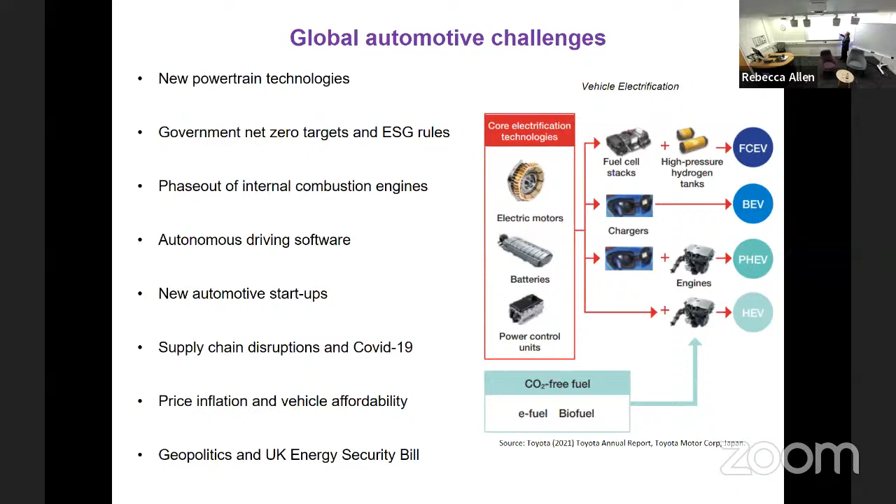We've then got the battery electric vehicle there, plug-in hybrid electric vehicle that merges a traditional battery electric motor with also a combustion engine, and you've also got the hybrid engine vehicle there as well. We'll be talking about these throughout today's session, okay?

The structure of today's talk is going to talk primarily about those 3 main innovations, and we're then going to talk about this new one, hydrogen combustion engine vehicles. They've only recently been developed. We'll talk about some of the implications that could potentially have for the automotive sector.

We're then going to look at Toyota, and we're going to pay close attention to Toyota as a case study throughout today's presentation. In particular, Toyota has a very high rate of patenting in the automotive industry and a very high rate of citations, and has played a key role with its suppliers in developing many of the core technologies that go into these different powertrain platforms.

We're then going to talk about my contribution to the literature, which is looking at how Toyota and its suppliers formed these innovations together in terms of buyer-supplier collaborations, supplier-supplier innovations, different innovation triads to basically create the core technologies that then go on to form the different powertrain systems. We'll then conclude with some managerial implications and conclusions as well.

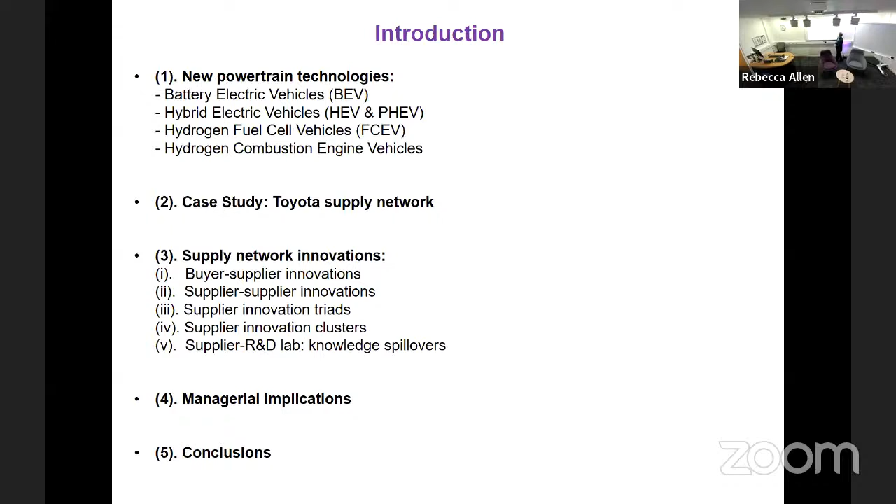So, when we talk about the different powertrain systems, think of an electric vehicle like this. So it could be, say, a Tesla, or it could be another automaker's electric powertrain system. You've basically got a very large battery, power control unit, an electric motor there. Okay. You then have the plug-in hybrid system, which basically means you have the battery, power control unit, the motor, a fuel tank as well, and the engine and the generator.

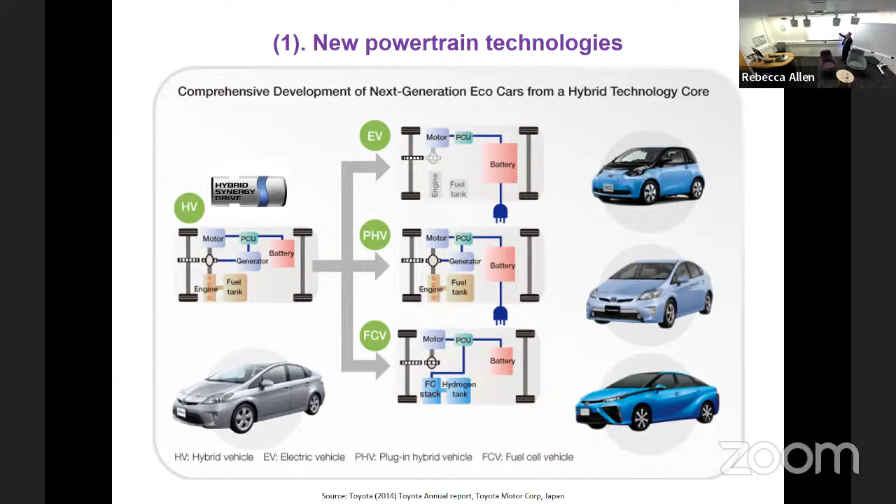That means that you can normally function the vehicle so that it can run on gasoline, and it can also run on the battery as well. It also has the ability to self-charge as it drives around too. And we then have the fuel cell system there at the bottom as well. So those are the 3 main approaches that many argue are the core basis of the automotive industry. So what does that then mean for the next 5, 10, 15, and 20 years going ahead?

So if you look at this graph, you can see the travel distance along the x-axis here and the vehicle size along the y-axis. And you can see how those 3 different powertrain systems form different parts of that graph. So the battery electric vehicles down here, which we're all used to, their travel distance is small to moderate, okay? And they tend to be much smaller vehicles, get a better mileage from them.

You've then got the hybrid and the plug-in hybrid ones here, where if you're traveling an intermediate distance, the vehicles get larger. And you've then got fuel cell over here on the right. Larger travel distances; they're hoping for things like trucks, but also the Toyota Mirai, which is a hydrogen fuel cell vehicle launched in 2015.

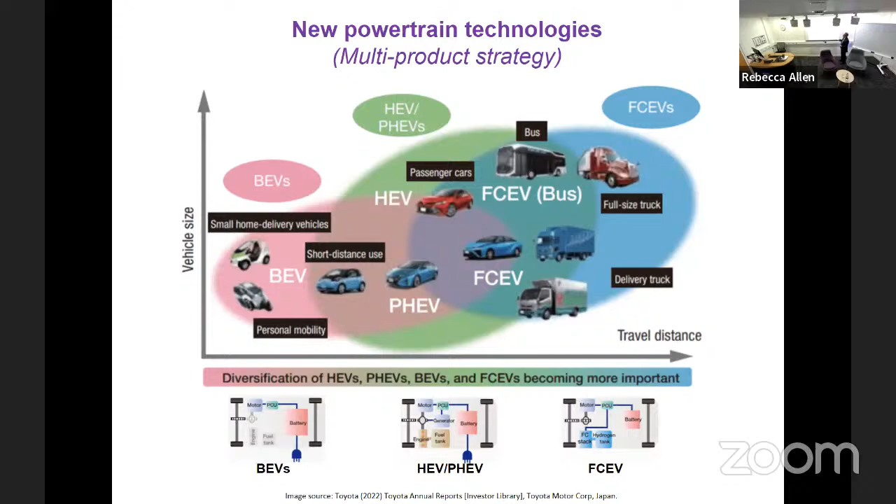Okay, and so that's where some people argue the automotive industry is kind of moving towards. Others argue it's going to be mainly around battery electric powertrain transmission, or as the batteries become more effective, they'll start to move out into this area as well. Okay, so that's really these three main different technologies and how they relate to distance and vehicle size.

So we'll look now at Toyota and see some of the innovations that they've been developing, because there's also on that graph the issue of personal mobility. If you go around Manchester here, it's a very dynamic city. You see a lot of people on electric bikes, electric scooters. Okay, went back probably about 6-7 years ago, that wasn't the case.

Okay, they've also developed at Toyota different types of technology platforms, including the Toyota e-Pallet, which is, best way to describe it, like a large vehicle that you can basically go inside. It's an autonomous vehicle and it will then move around the city a bit like a large taxi. And the idea here with its level 4 automation is that during the day, passengers will join onto the actual e-Pallet system. They'll move you around the city like a taxi or almost like a tram.

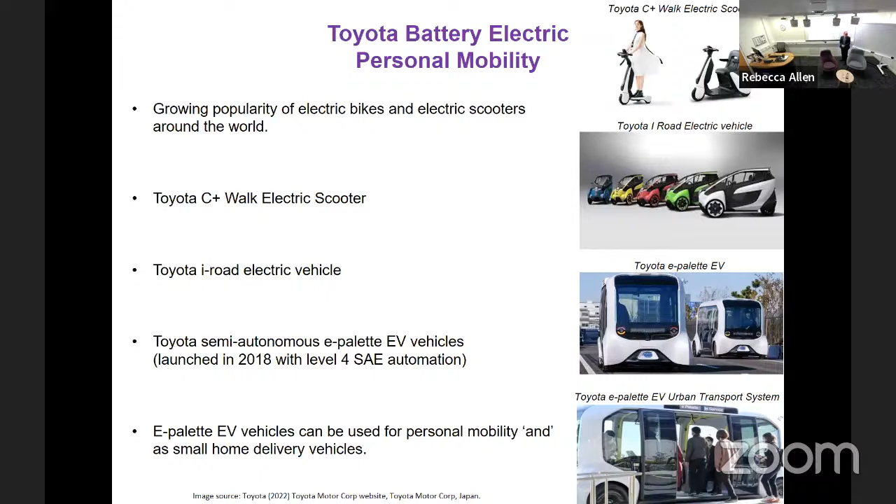And then in the afternoon or evening, they can then switch over to be home delivery vehicles as well. And so they piloted this and they used it at the Tokyo Olympics. Okay, so that's one of the technologies they're doing for personal mobility.

The battery electric vehicles, though, Toyota has been launching as of this year a much greater range of their vehicles, particularly the new bZ EV vehicle range. They have experimented and used electric vehicles before. The EV technology department was originally founded in 1992. They had the RAV4 EV as well, but from around 2010, they haven't had as many electric vehicles come onto the market. There's some of the reasons for that we've discussed later on, whereas other automakers have stepped in much more heavily into that area.

Another area where they've been investing quite heavily is in solid-state battery technology. Okay, so they announced, I think it was this year, this is a video that you can watch online of the solid-state battery vehicle moving. So solid-state batteries are much faster charging time, and it's hoped that they will be a big step in improvements in battery technology. No automaker has yet actually put a solid-state battery into a vehicle and got it to work on a normal kind of basis. So they've got a start of production date of 2024, which will be a major breakthrough in the automotive industry.

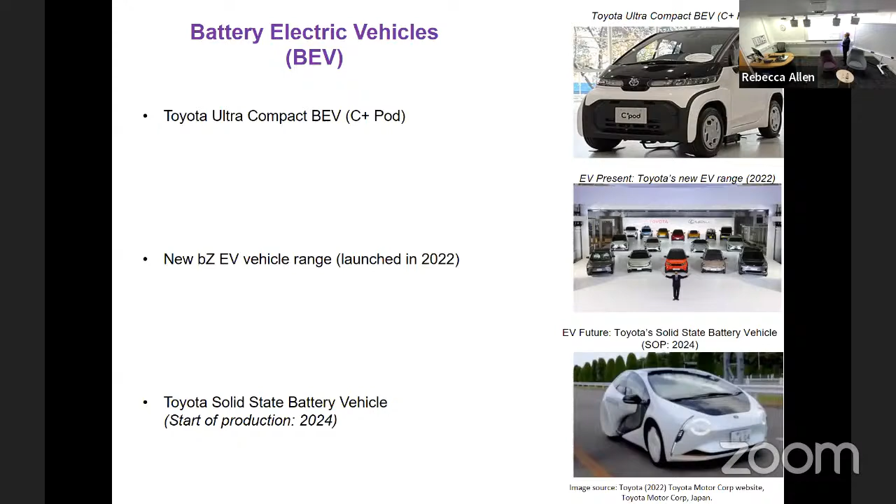Interestingly, they're looking to put solid-state battery technology into the hybrid engine, not the electric vehicle engine. Some of the reasoning for that is the technology is still quite new. So you want to practice it in a hybrid setting where you know the technology well before you introduce it into a pure electric system.

They're also well known for the hybrid vehicle, shown here. And the hybrid vehicle engine, it's a really big breakthrough. It was launched in 2015 on the 4th generation of Toyota Prius. And it integrates into the Toyota New Global Architecture as well, which means that they can move different powertrain systems inside the same underlying vehicle architecture that they have.

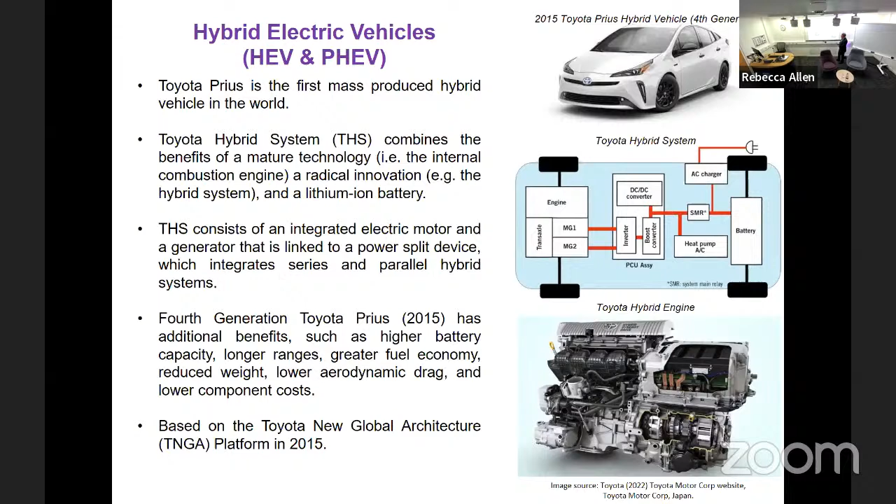The next one, which was launched in 2015, and this was a really big breakthrough, was the hydrogen fuel cell electric vehicle. Now, this is a really path-breaking piece of engineering. What it basically means is the vehicle uses hydrogen from a hydrogen fueling station to run, and it produces no CO2 emissions at all.

Okay? So the way it works is it takes airflow through the front of the grille, which is here. That then gets supplied into something called the hydrogen fuel cell stack. Hydrogen is also stored in a compressed hydrogen tank as well. It reacts with the oxygen inside of the fuel cell stack to generate electricity and to drive the electric motor, with the only byproduct being water. Okay, so this was a really path-breaking innovation.

To actually mass produce a fuel cell vehicle that runs on hydrogen was seen as a big step in the automotive industry. Of course, the downside of hydrogen fuel cells is you have to create the hydrogen in the first place. Okay. So while there's a lot of interest in electric vehicles, hydrogen has not taken up as much due to the fact that it's difficult to build out the infrastructure for the hydrogen supply.

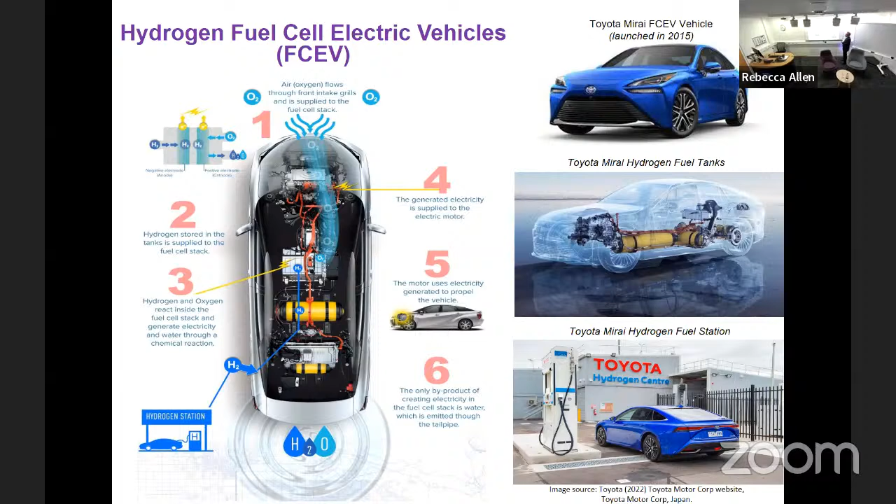Okay, but the good news is that we have the technology now. Okay, if you went back to 2012 or 2011, some of these systems didn't even exist except on the drawing board or in a laboratory.

Okay, so what happens next? So 2015, hydrogen fuel cell vehicles launched. A lot of governments around the world then decide we want to try and ban the internal combustion engine or phase out its usage over the next 5 or 10, 15 years. A lot of governments have signed up to that.

Toyota then also launched another radical innovation, which was the combustion engine that drives on pure hydrogen. So in this setting, you're using a traditional combustion engine. You're taking compressed hydrogen from the storage tank here and injecting it into the engine. It's driving the engine itself, produces no CO2 emissions. Another incredible breakthrough. It took them a long time to do this.

It's based upon a 1.6 litre GR Yaris engine, like the Yaris you might see driving around here. They basically took that, they used the compressed hydrogen inside to then get it to drive. Now, it does emit a small amount of CO2 emission because when the piston comes down, it will burn some of the fuel, some of the oil inside of the tank here, a very small amount. And there is obviously the problem that it can produce some nitrogen oxide as well.

But the good news is that they're making progress, okay? And they're moving things in the right direction. And they're collaborating with one of their suppliers, Yamaha Motors, to continue to invest in this technology in the future.

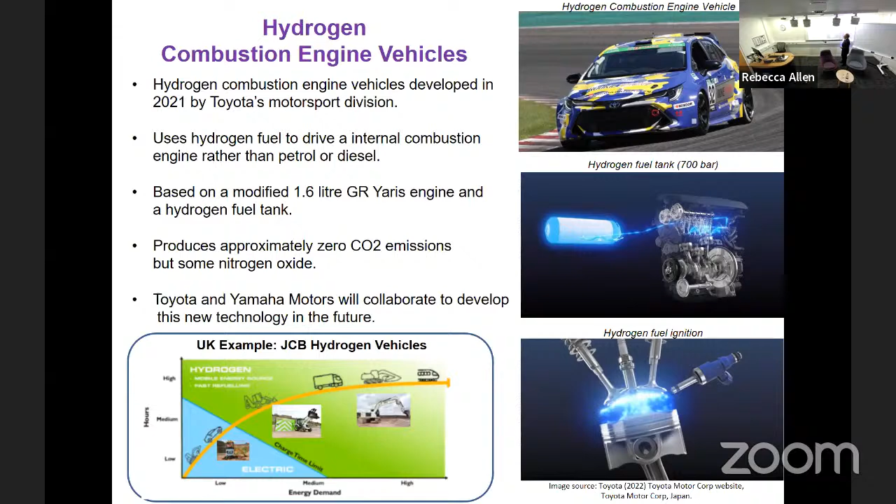So what this is showing us is that over the past 10 years, and incredibly more recently, there's been a lot of change. If you went back to 2010, some of these technologies didn't exist. Hydrogen fuel cell vehicles and hydrogen combustion engines were just ideas on drawing boards that they were experimenting with, but hadn't really taken off. We also had the emergence of new entrants like Tesla, who have really transformed the automotive industry, particularly in battery electric technology. Okay?

So there's lots of change that's been happening. And so I was looking at this after doing a really great project with Benn Lawson, who's at the University of Cambridge now. And we've been looking at how you integrate suppliers into new product development processes and how you solve some of these really ambiguous problems that occur during the innovation process.

And that was really interesting because we got some really good insights by doing surveys with firms in the UK, doing case studies. But one of the downsides of that approach was we're getting very focused on particular projects and also a general picture of lots of different innovation projects occurring in the UK. But we weren't really capturing how the supply network as a whole creates innovations.

And so that's what I decided to look at next, how one automaker and its supply chain develop technologies. Now, at the time when I started this project, I didn't know that Toyota was developing the hydrogen fuel cell vehicle and later doing investments in hydrogen combustion technology and also doing solid-state battery development. I was quite fortunate in the sense that I could see in the patents and some of the scientific papers they were publishing that they were moving in that direction. So I decided to study how their supply network developed some of those core technologies with them.

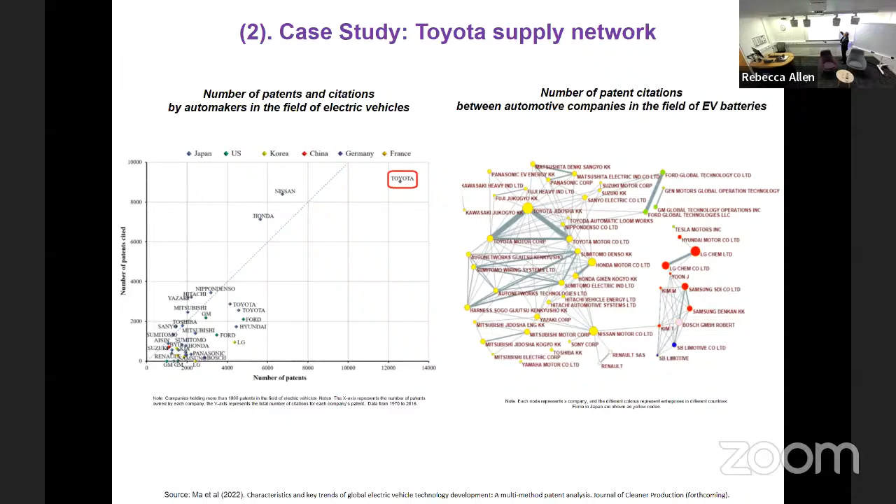And you then look at the patent citation data of EV battery technology, again, 1970 to 2016. The yellow dots here are all Japanese firms, okay? So very high density of citations of patents between automakers and their suppliers inside of Japan. This is the one for the States as well. So we know that there's a high degree of innovation occurring across their whole supply network and a high degree of citation of their patents as well.

Now, I also teach course units on operations management and lean production, and we focus a lot on the supply chain management practices that they use at Toyota and other lean companies as well. These are a list of the main supply chain practices that we know play an important role in improving organizational performance and also in fostering innovation. So it's things like having an operations management consulting division, an internal group within Toyota that's tasked with developing their suppliers in things like the lean production system.

We know that they transfer employees from Toyota to their suppliers, in some cases for free, for extended periods of time to work on technology together. They have voluntary learning teams where they have problems inside of the supply chain they want to try and solve. They have a supplier association of their core 219 suppliers that over the past 40, 50 years they've been working with to improve their operations.

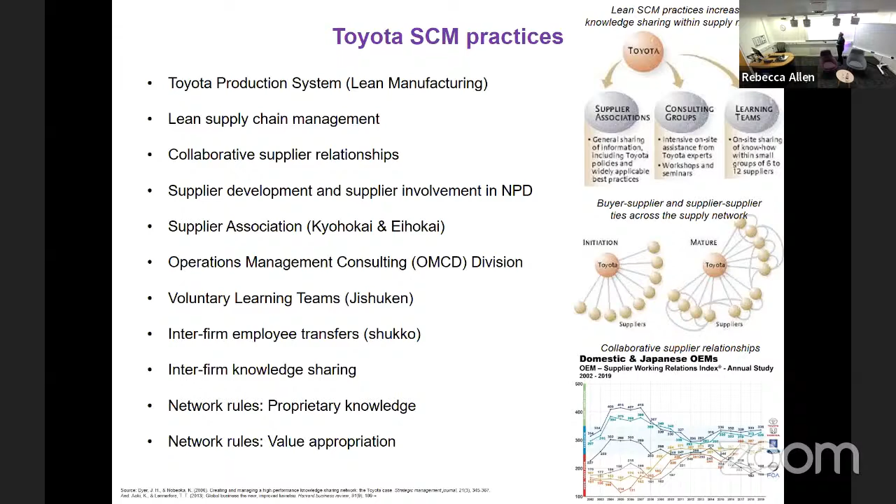So we know that some of these practices can have a real world effect. We haven't really been able to see the wood for the trees. We've been focusing a lot on particular projects, particular relationships. We haven't really been able to see how the whole network actually facilitates this process.

And I was quite lucky in that MarkLines, which is a company that provides market information about the automotive sector, publishes data on all the supplier and customer linkages inside the Toyota supply network, but also for other networks: Honda, Mitsubishi, Tesla, GM, Ford, BMW, everybody. And so you can actually use this data to produce these lovely maps. This is actually from Kito, who was a researcher at the time at the University of Oxford, and she was the first academic to actually map the whole of the Toyota supply network. And this contains thousands of connections, hundreds of firms.

And you can then break out this network and look at individual clusters around a clean energy product or the fuel cell system or just simple things like the vehicle lamp, all those integrate chemicals and different compounds that are used inside the plastic or inside the filament. You can actually break it down into different details. You can also produce network diagrams like this, looking at how different firms in the supply chain are actually owned and have cross ownership relationships with the automaker, but also with each other.

So you might be Denso, which is a big supplier in Japan, but you may also have shareholdings in other suppliers inside of Japan as well. It also, to a certain degree, means you can then start to look deeper inside the supply network. So if you're an automaker here, then you might be buying an engine component here, then look at the company that makes the metal, the company that forges that metal, the castings, and the supplier further down.

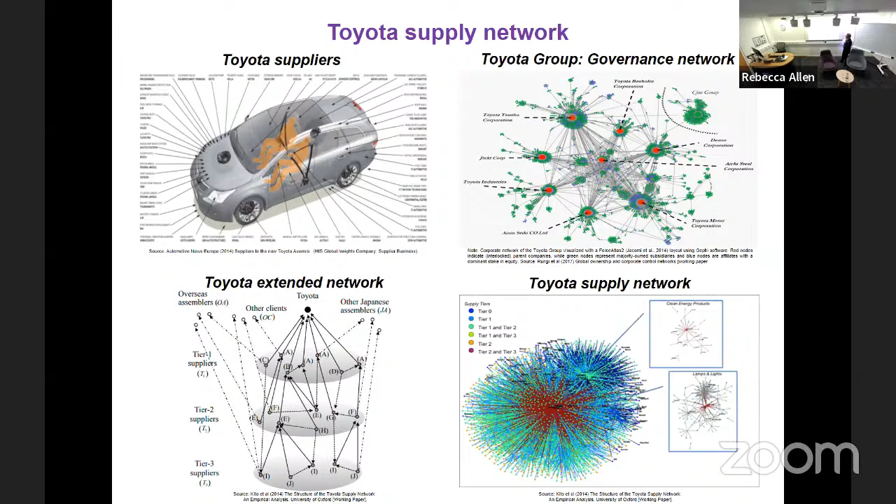But the good news now is the secondary data is available for us to start to do that. And that wasn't available about 10, 15 years ago. It's quite new access we have to this type of technology and data sets. There's also other data sets we can use, like S&P Capital IQ, the Bloomberg system, that can provide us with a fine-grained level of detail too. So my research really comes in to start to look at more of a network view of the innovation process inside the supply chain.

It's important to highlight what your original idea was, okay? This is something I actually drew out on one of my lecture slides back in about 2012, okay? And I thought, right, I'm gonna look at the third generation Toyota Prius, okay? Let's just think conceptually, how did they develop the electric motor, the engine, and the hybrid battery?

The important thing to highlight here is most of the patents are registered by Toyota, and they're only for Toyota. And you see the patent, you see the researcher's name, and then it says Toyota Motor Corporation, or another word for Toyota. But when you start to look into it in more detail, you see the sprinkling of other patents inside of the patent database that relate to these suppliers down here.

So it could be that Toyota's co-patenting with a company that makes part of the engine. It could also be that they're co-patenting with a company that makes a rare earth metal here as well. But it could also be that two of those suppliers are actually co-patenting together. In some situations, you have these strange triads emerge, which is when you have Toyota and two suppliers that all co-patent an innovation together, okay? You have other ones where the suppliers are connecting horizontally across the supply network.

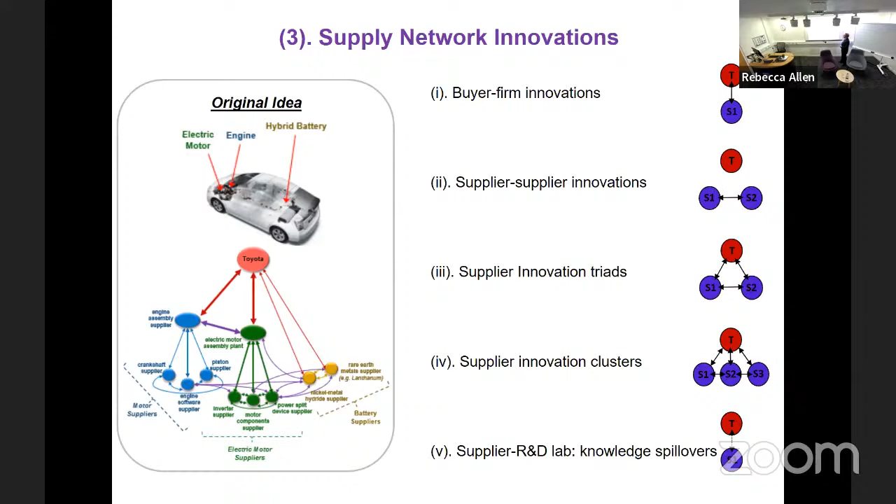So that's really how, it's kind of a bit strange, our teaching, because I was working with the students at the time, trying to figure this out, like how come they're innovating in these really unusual ways that we don't know about in the journals, we don't know about in the textbooks. And I put it on one of my lecture slides, I ran the idea with my students, I spoke to some people in industry, and it's like, yeah, it kind of makes sense. But again, we had these little examples of it, but we didn't really have a full picture of why they were doing it.

So what I decided to do, I decided to go through and map the Toyota supply network. And it takes a long time to do that, okay? Multiple years, okay? It's a long, hard process. Very few people have actually mapped a whole supply network. You would have probably seen some of the supply chain disruptions that have occurred. You're probably thinking, well, how come people don't know who their supplier is, or who their second or third or fourth tier supplier is? And the answer is many people don't spend the time to actually do that activity.

Very labor intensive. It's very, very difficult to actually do it. So we mapped the supply network of the 219 firms inside Toyota's suppliers, the supply association, the supply network. And we then looked at their suppliers through this network as well. And what I decided to try and do is try and answer some important questions.

First of all, let's take a step back and think, why is the automaker co-patenting with a supplier? Okay, so that's just when the automaker and a supplier are both registered as co-patent inventors on the patent record. And that would include things like the battery pack, the negative electrode discharge device, braking systems, fuel pressure control systems, software as well as hardware they were patented, okay?

And what we decided to do is I developed this conceptual model where we looked at the relatedness between the automaker and the supplier. So relatedness is a metric that's used, published by Bryce and Winter in Management Science. Neffke has also worked on this in Strategic Management Journal as well, where you basically take the SIC industry code of a supplier, which is operating in an industry that's aligned to or close to the automotive sector.

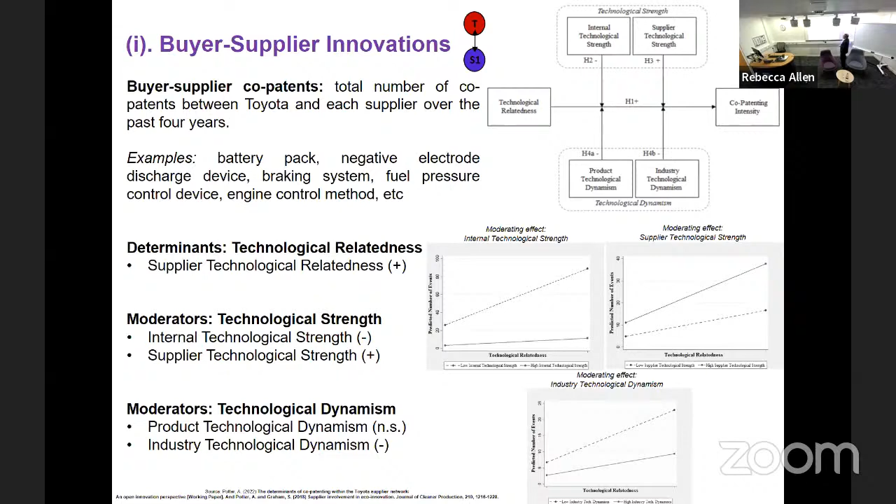So that explains why a particular automaker co-patents with one supplier, okay? But it doesn't give us the full picture about what's going on. Remember, inside the supply network, you also have suppliers co-patenting with each other. And so we mapped out the supply network in a similar manner here to Kito's diagram. And you can then see these little clusters of firms that emerge for particular technologies. And what we then started to do was to figure out why particular firms are co-patenting with other suppliers together. And this will include things like fuel injection nozzles, hydrogen fuel cell technologies, electric power conversion systems.

What we found is the more linkages the firm had within the supply network, the higher degree of co-patenting with other suppliers. However, if they have lots of linkages to customers, so you might take a firm that's got lots of links to other customers inside the network, that doesn't always result in a positive relationship, okay? Now, the network and academic theory literature would suggest that the structure of the supply network plays an important role in determining who they patent with, okay?

Particular measures like betweenness centrality, which measures whether the firm is a broker or a key player according to the number of connections in the network. We find out that that's not actually important for supplier-supplier innovations. We also find out, interestingly, that the closer the firm is, according to its closeness centrality, its kind of freedom within the network, often towards the center of the network, you tend to find less supplier-supplier innovations occurring. Most of the supplier innovations are happening at the periphery.

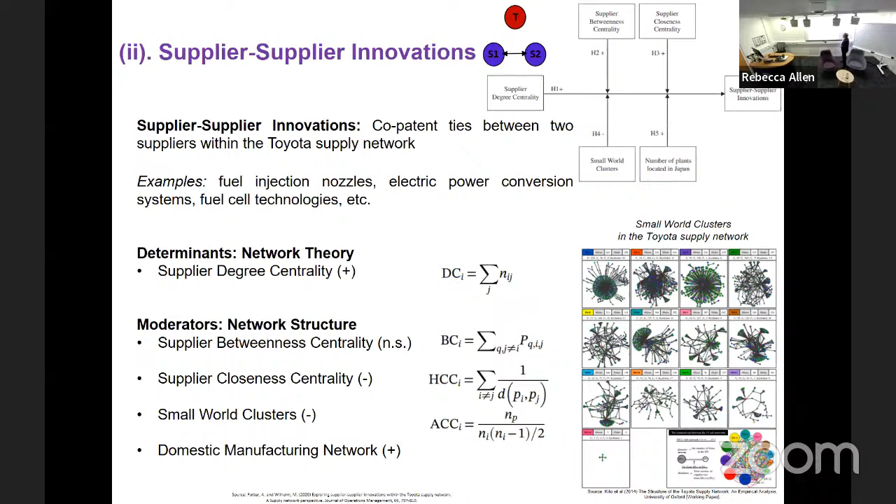So the final couple of things I want to talk about is about these other forms of network structure that get less attention in the academic literature. Professor Tom Choi from Arizona State University was one of the first people to highlight the importance of what we call supplier triads. Supplier triads are a collection of 3 organizations that collaborate together. They can occur in many settings. So, for example, here at Manchester, we had linkages with Toronto University and also with Melbourne as well. That acts like a triad. We share knowledge, those sorts of things. That can also occur within supply networks.

And this is a paper by Arora and Brintrup, published in 2021. That's all the supplier triads inside the Toyota supply network. There's hundreds of them. And what we find is that, strangely enough, there's a high degree of patenting between the automaker and 2 suppliers on one patent. And you don't find that in many other automaker supply networks. One of these very unique features, which is a high degree of supplier-supplier innovation and a high degree of supplier triadic innovation, is what we didn't expect to see.

And that's in things like battery management systems, electrical connectors, which kind of makes sense because you have to get a battery maker involved in the innovation, as well as the software firm, as well as the company developing the electrical connectors as well. They all need to be together in the same innovation. Now here, for a triadic relationship, it's a lot more complex. And as a result of that, the automaker has to have good leadership relationships.

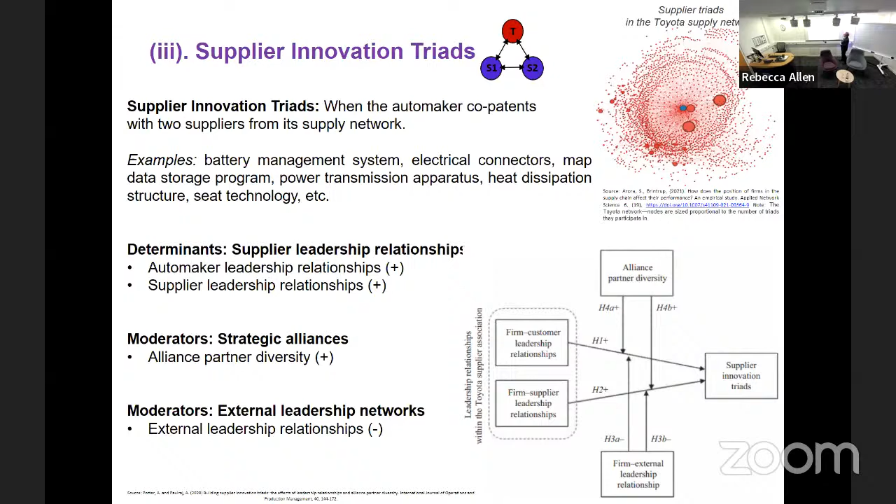Final things just to kind of touch upon now. My next research is looking more at the kind of clustering effect, which is when you've got multiple suppliers co-patenting with Toyota. So you've got suppliers in the supplier association, as well as universities, research institutes, and you've got more of an ecosystem of lots of firms collaborating together, often in things like mobility services, where there's a greater role of universities playing a role in that part of the network.

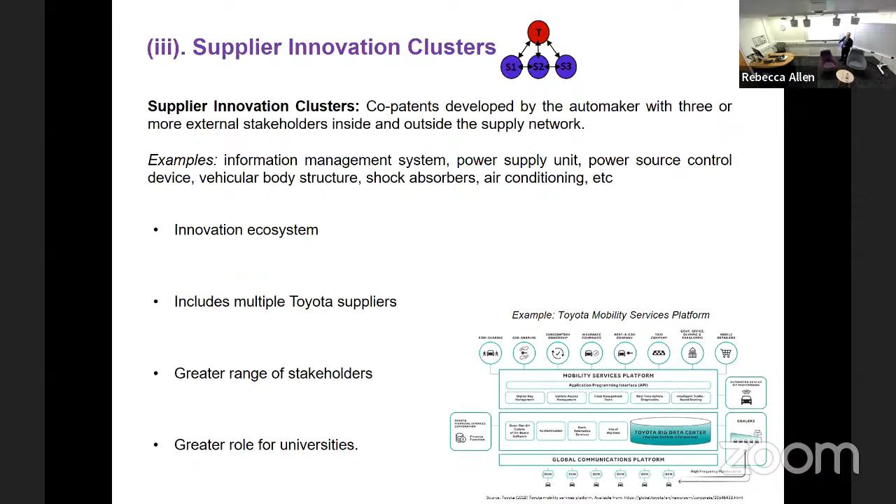The final thing to mention is about the role of innovation inside the R&D lab. This is an important thing to highlight. In the UK, we tended to have had a lot of investment into universities, which is a good thing for R&D. But in the private sector, there's been more of a downward slope, particularly in America, in terms of private sector R&D labs, big industrial labs that we used to have 20, 30 years ago.

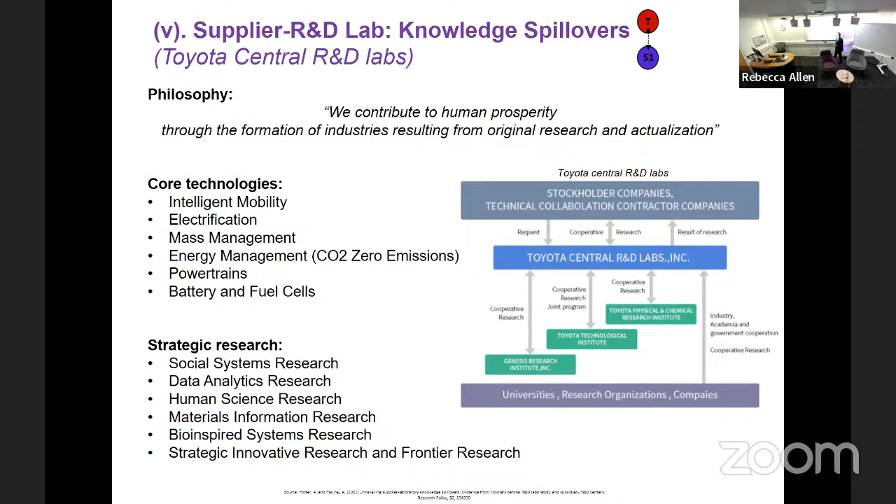And what we found looking at Toyota's central R&D lab is that it has a lot of good connections with the suppliers, but also they look at core technology in terms of powertrain, battery fuel cell systems, but they also deal with the social sciences, much more increasingly recently in terms of data analytics, social systems, and lots of other technology and how consumers are going to be using Toyota's technology in the future. And so looking at these sorts of

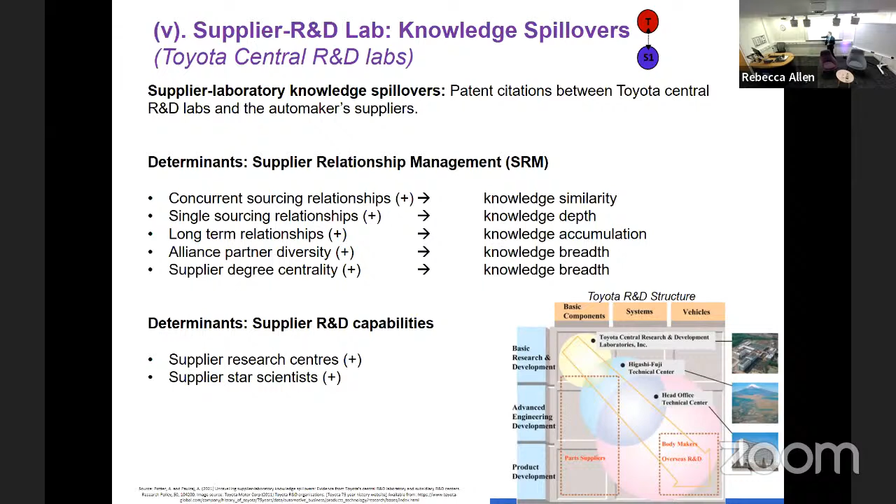relationships, we then looked in particular at the knowledge that's spilled over in patent citations between Toyota Central Labs and the automaker suppliers, particularly with something called concurrent sourcing, which is when the automaker makes a component but also buys the component from another supplier, single sourcing relationships, long-term, and also the centrality of the firm inside the network and its relationships were all found to increase patent citations, okay? Particularly if the supplier had a star scientist or a research center, it also played a role.

The final couple of things to mention is looking at, how do we measure all of this? Okay, so we look at patent data, we look at supply network data, we look at data on buyer-supplier relationships. You think about it as layers in a cake. Okay, you've got innovation at the top in terms of patent data, you've got citations above it, you've then got a layer of management relationships between boards of directors, another layer of relationships in terms of strategic alliances, and you've then got the supply network underneath.

And we then use statistical and econometric techniques to basically show that these relationships exist, and we test them. This is quite important for the more junior staff who are here, the new lecturers and senior lecturers. It's important to make sure that we learn some of these techniques. They're the ones that are used to add a higher degree of validity and robustness to our data. It's things like endogeneity analysis, looking at past data, current data, and the future. Can you predict which firms are going to innovate in the supply network based upon your analysis?

That's what one of the reviewers asked me to do from a top FT50 journal. They said, great study looking at the past 4 years, fantastic results. I want you to predict for the next 3 years what's going to happen to those innovations. I was kind of, oh my God, it's a really complex thing to do. So I went away, back through the patent databases, downloaded the data, stuck it into the model, and it worked. So the structure of the supply network can actually predict, to a certain extent, it's not the perfect model, but it will predict which firms are going to innovate inside the network in the future. Okay, and that's quite a big step from an econometric point of view.

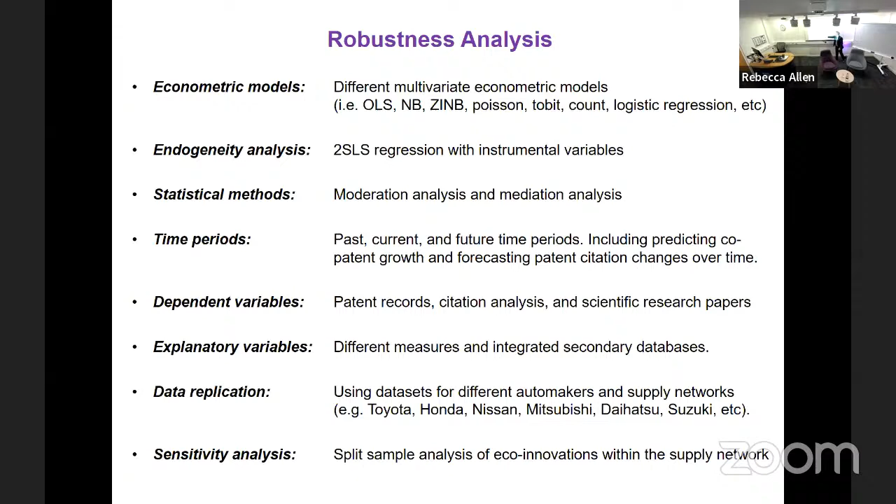We also test our relationships, not just looking at patent data, but also looking at scientific research data as well in terms of those variables. And we also replicate some of the data using different automakers as well.

Okay, so the final couple of things in terms of managerial implications. Investing in an R&D research laboratory is very important. And a lot of firms sometimes tend to want to not do that because of higher costs. Look at things like lean production, lean NPD activities to improve the innovation process.

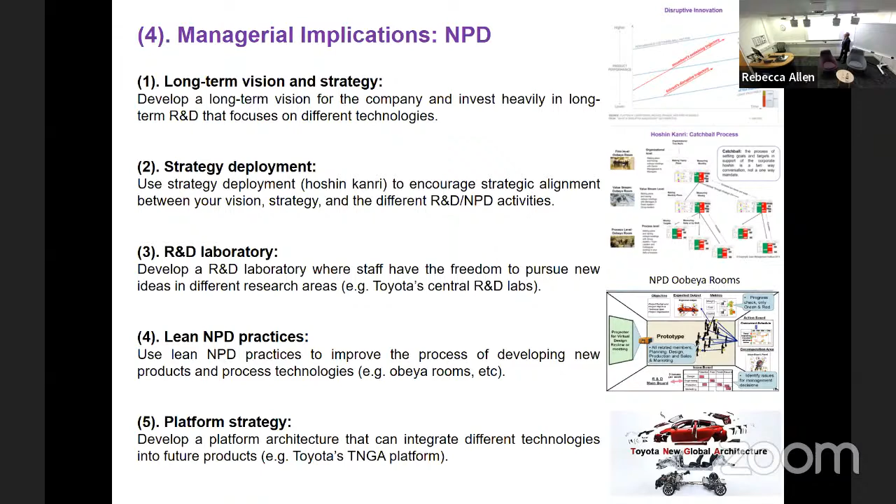And from the supply chain point of view, it's important to map the supply network, okay? Not just for finding disruptions and bottlenecks, which we've all been focusing on, but for mapping innovations and where technology is moving in the future. Then build good leadership relationships with those suppliers that are developing that technology. Use lots of supplier relationships to embed that as well. And think about developing some of these more complex co-patenting relationships in the network.

The final thing to highlight here is this, which is where my research is going to focus a bit more in the future. Looking at the Toyota production system and how it improves productivity and lowers the costs of the vehicles and technology. Because that really is the stumbling block now, okay? We know how to develop the technology, okay? And a lot of new technology platforms have been developed and they will be developed in the future. We've got to find a way to make it more affordable for us to consume, given that the inflation rate is where it is at the moment, okay?

So a quick, short summary. There's lots of new powertrain technology evolution in the automotive industry. It hasn't stopped, it's continuing to evolve. There are different ways to innovate with your suppliers that weren't normally fostered in previous decades of the automotive industry. So it's not just about the new technologies we all tend to focus on, they're actually innovating in a brand new way as well.

Okay, and that's something that doesn't tend to get picked up in the literature. Of course, there are some limitations for this single study with one supply network and looking at patent data primarily, which does have some significant limitations. In terms of future research, I'm continuing looking at innovation. Look at more how other automakers' networks operate and how the networks change over time. But increasingly, I'm going to focus a lot more on productivity in the automotive industry and how we can tackle some of the productivity puzzles that we have in the UK as well.